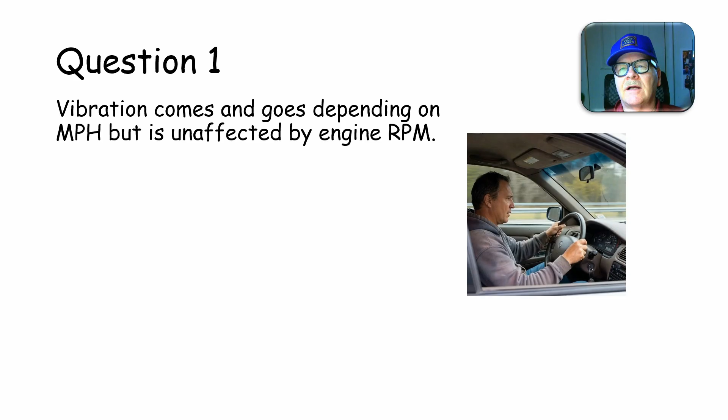Question 1. A vibration comes and goes depending on miles per hour, but is unaffected by engine RPM. Is that maybe a dual mass flywheel out of balance, or prop shaft balance, or worn U-joint, or does the pressure plate have a broken spring, or maybe a collapsed engine or transmission mount?

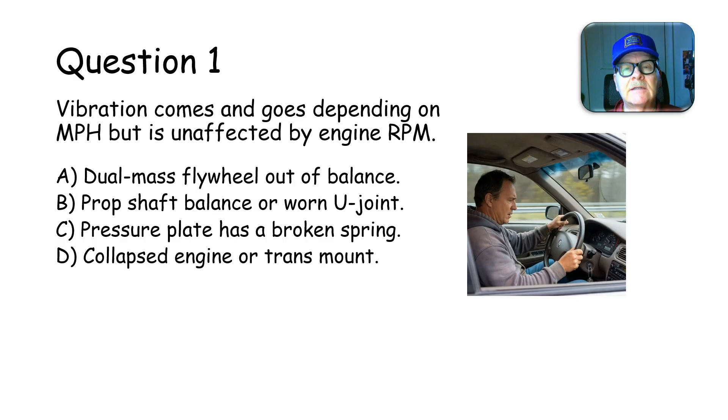Question 2. A limited slip differential chatters when the vehicle is turning a corner. Is it an out of round carrier, a bad outer wheel bearing, ring and pinion backlash, or does it need friction modifier?

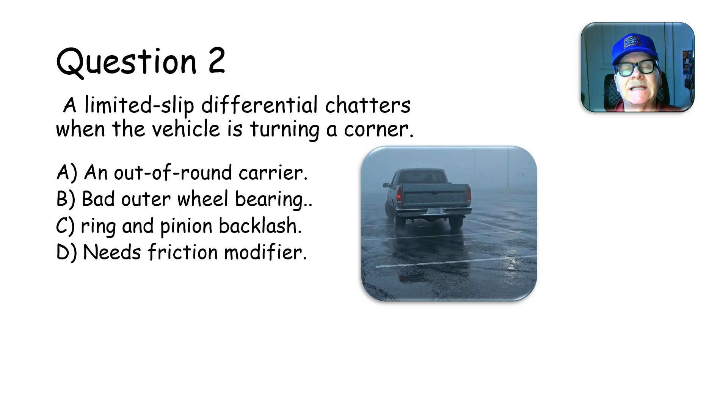On an EPS scan tool live data feed, what is torque sensor data? Does it measure motor current? Does it measure steering force? Does it calculate engine load? Does it measure steering angle?

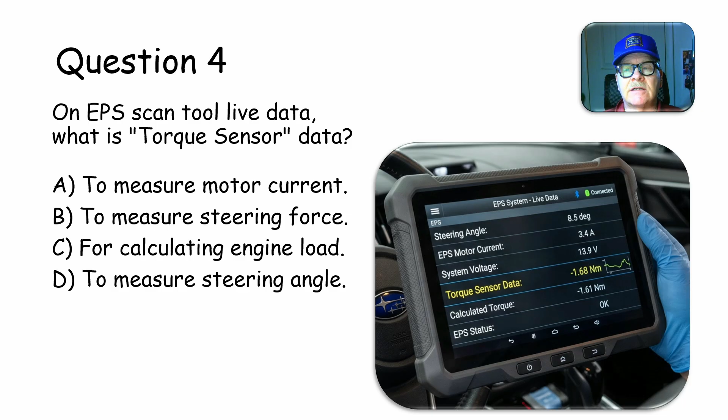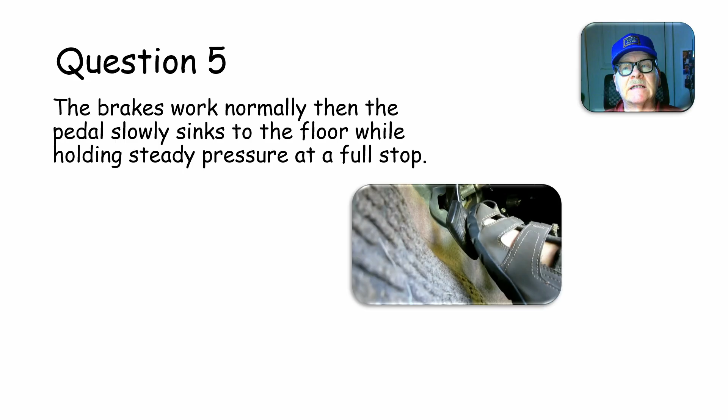Question 5. The brakes work normally, and then the pedal slowly sinks to the floor while holding steady pressure at a full stop. If the ABS pump motor is running, does that mean the master cylinder seal leaks, the hydraulic booster is leaking, or old brake fluid is foaming up?

Question 7. The battery dies overnight and a parasitic draw test shows 500 milliamps. Is this normal for vehicles with computers? Should the draw be 0 after the modules go to sleep? Is it normal if you're equipped with remote keyless entry? Or should it be less than 50 milliamps overnight?

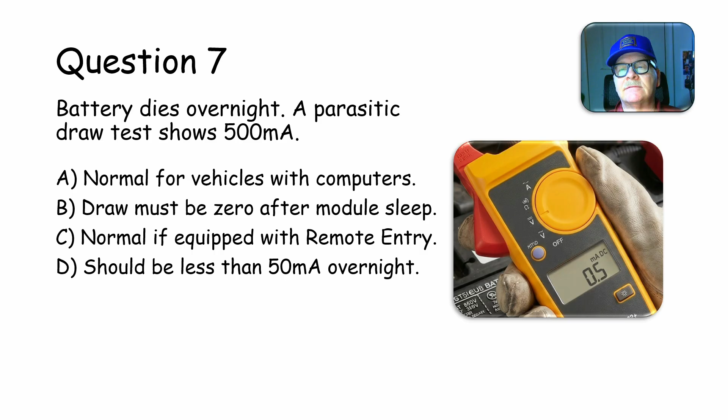Well, let's see what we can do about getting some answers to these things.

Now, this vibration, as you see coming and going, if it comes and goes with vehicle speed, like if it comes in at 45 and then goes out and then comes back in at 65, you're finding the resonance of an out of balance drive shaft, or you're going to have a worn U-joint, which won't feel exactly like an out of balance drive shaft, but the point is you're going to have a prop shaft balance or worn U-joint issue if you're feeling something like this.

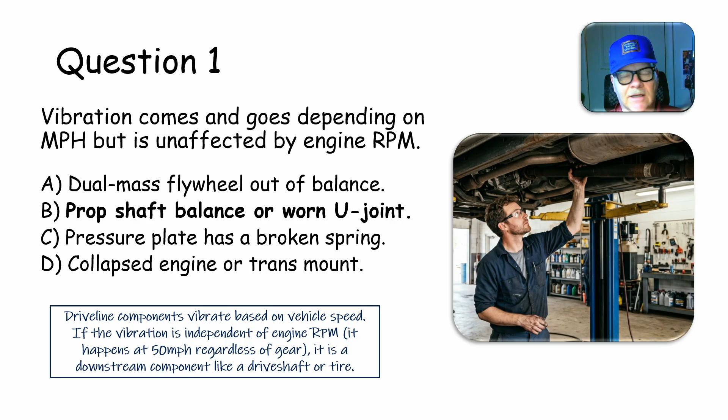Question 2, limited slip rear end. It needs friction modifier. That's the deal on that one.

The friction modifier that Ford makes that you put in these things stinks so bad. I used to keep a little bottle of it on my teaching desk, and I'd take the top off and pass it around so people could smell it and know what it's like. Boy, that was some stinking stuff.

But the interesting thing was I had a Taurus one time that was doing a surge. It kind of felt like an EGR surge, but when I started monitoring the modulated torque converter signal, I noticed the surge seemed to match that. I realized what I really should have done was a transmission fluid change, but I took some friction modifier I had in my toolbox and poured a little bit in there, and that cleared it right up.

The reason it cleared up is because the torque converter clutch, as it was modulating 10, 20, 30, 40, 50 percent, was not slipping smoothly—it was chattering and slipping. On Crown Victorias, you'll feel something like you're running over those little parallel asphalt strips coming up to a stop sign. It'll feel like that when the friction modifier is gone. Usually a transmission fluid exchange on those will take care of it.

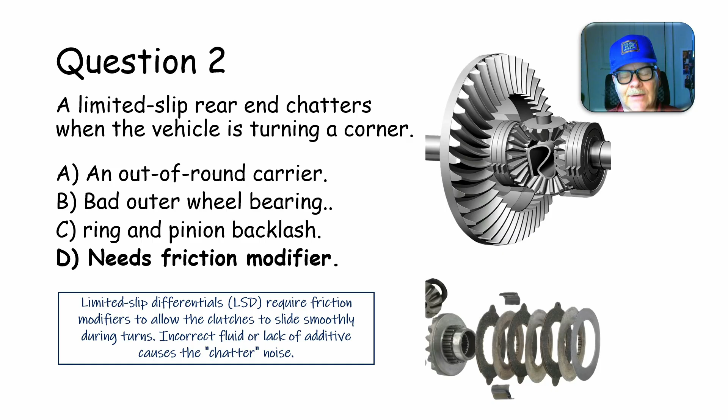If you can smell the fluid that's got the friction modifier in it, can you tell a difference between that and regular transmission fluid? I took a long time on this slide. I didn't know. Question 3.

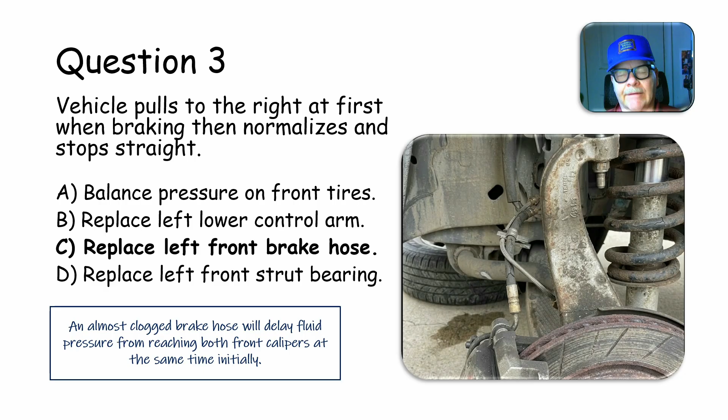This measures steering force, the torque sensor data. When you're turning the steering wheel, it needs to know how fast and how hard you're turning it. A lot of times it'll measure steering angle and steering force. So that distractor there is probably not very good, as far as that goes. I've got to turn on my laser here.

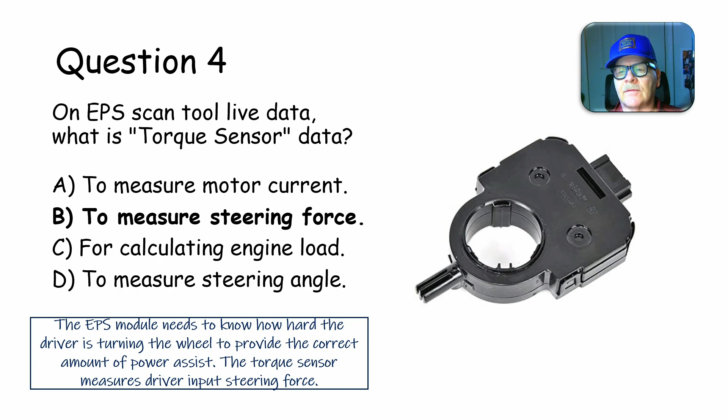All right, now then, question 5. The brakes work normally but the pedal sinks slowly to the floor while holding steady pressure to full stop. That's master cylinder seal leaks. This is just a little microcosm of that. When the seals are leaking, initially this rubber seal will bite, and then whenever you keep pushing it, it starts letting fluid leak past, and this goes forward because it's trapping pressure in front of this. As the pressure leaks past this into the back of it, then you're going to feel the pedal go to the floor. Then you'll let go of the pedal and hit it, and it'll stop again, and then it'll go down like that. But sometimes, in rare cases, some of the ABS valves can cause that, but that's almost never the case.

It's important to use a silencer band because it dampens rotor vibration and keeps it from making little chattering marks on the rotor. Now, you might notice this one I'm showing the video of was one that we had. This one didn't require a silencer band, and the reason that particular unit doesn't require one is because the cutting bits, while you're doing the cut, are making little circles in addition to machining the whole time, causing a non-directional finish, which keeps it from needing any kind of silencer band. This particular on-car brake lathe - not all of them do that. A lot of the on-car brake lathes still require you to put a silencer band on it, but this particular one didn't. It was one that I paid $12,000 for when I put in that new. I started a new automotive program in a town up the road, and we bought this one here, and this is a really, really good one.

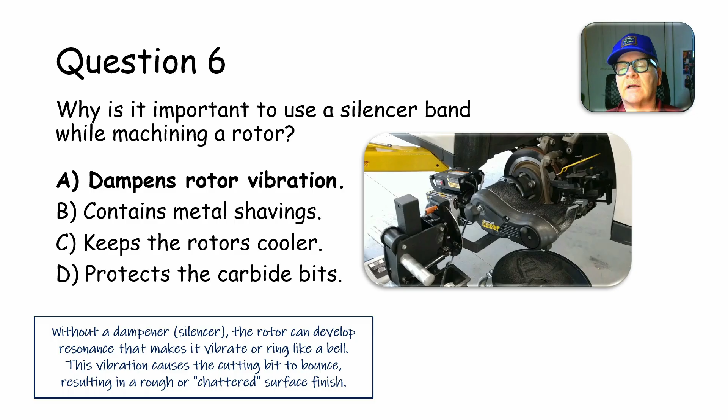Question 7. Battery dies overnight. A parasitic draw test shows 500 milliamps. It should be less than 50 milliamps overnight after the modules go to sleep. The reason for that is you've got little capacitors in here that have to charge up. A lot of the time - we had a 2010 Mustang, and we measured a draw that was probably 500 milliamps or something like that instead of 50. So I told the students, let's put this meter on this thing and just leave it alone, don't touch it, just let it sit here. We let the car sit there a solid hour, and after it sat there an hour, the current it was drawing dropped off to below 50 milliamps. So we determined that way that we had a bad battery on that particular one. But the simple fact was, you could have gone off on a rabbit trail if you measured 500 milliamps and immediately went looking for that.

Well, if you got one that doesn't go away when the modules go to sleep after an hour or so, what I would do is remove one of these big fuses going to the fuse panel, and put either that or an inductive probe around here, or hook an oscilloscope up to an inductive probe and let it show you on the screen.

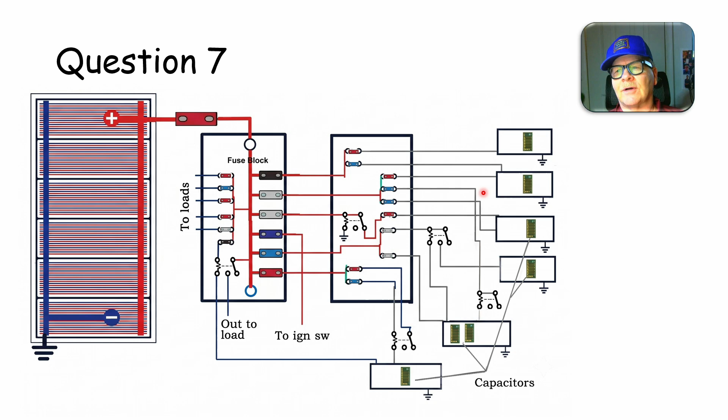Then you start pulling your big fuses. Let's say you pull this big fuse here, because it's feeding these fuses here, this one feeds all these little fuses, this one feeds those two fuses. Let's say pulling this big fuse killed the draw after all your modules went to sleep. You pull this one, it kills the draw, put that one back in place, then pull each one of these and see which one the draw is going through. You see how that works, that's how you're vectoring in on the draw.

Question 8. Passenger power window only works from the driver's side switch. Replace passenger switch, no joy. Okay, now this is the thing.

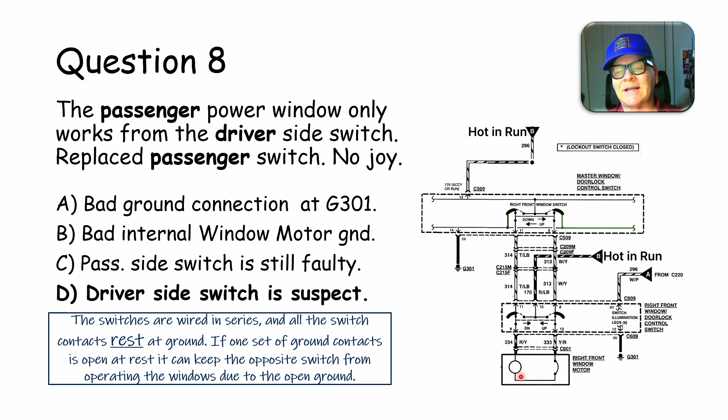You might notice how the driver's side switch is suspect, and I've run into this before. I've had my butt kicked around by one where the passenger side power window wouldn't work. I replaced this switch and it still wouldn't work, and it turned out the driver's side switch was causing the passenger side window not to work, even with the rest of it working just right, even with this switch.

But here's the deal. You've got a rail in that switch giving you voltage right here, and another rail here. Whenever this thing goes to lower the windows, let's say both of this ganged switch goes over, this stays on ground, this goes over to power, right? So this goes down here through that.

But when you release this, it comes back up here and you've lost your ground going to this switch down here. So if you let this come back up and that ground goes away—see, because that ground is still required when you're using this switch right here—then when you're using this switch down here, it has to get a ground through this normally closed contact in order to operate the motor. If it doesn't have a ground, it's not going to.

So what I taught my students to do was go over to the switch on the passenger side, find the wires coming from the other switch, and measure to see if there's a ground on both of these wires when the switch is at rest. When all the switches are at rest, you don't see a ground here, you don't see a ground here—I'm between the two switches, you see.

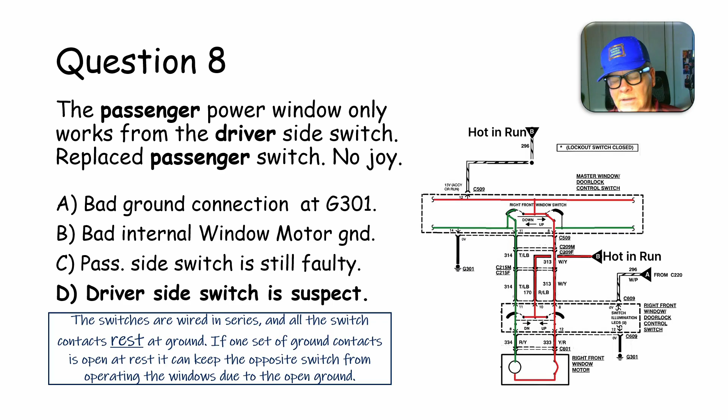Then I go to this switch up here and measure here and here. If I don't see a ground here, I know this switch is bad. If I do see a ground here but not here, I know I've got a problem somewhere on this circuit. That's not rocket science, but you just basically need to think while you're doing stuff like that.

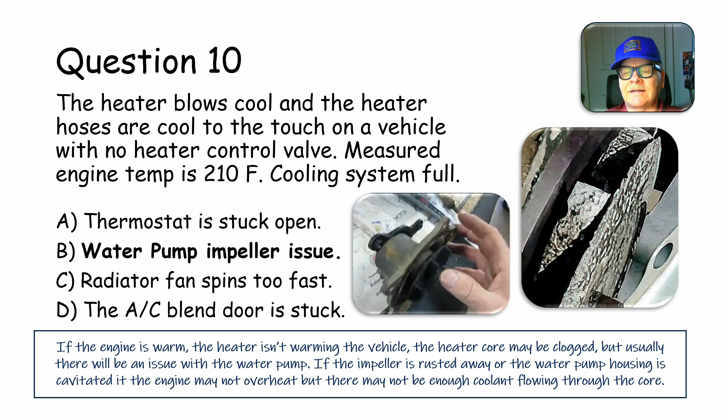I told you I take both heater hoses loose from the heater core, and I put a clear hose, like you buy from Ace Hardware, in there. This is a temporary thing, and you fire it up and look for coolant to go screaming through that clear hose. If coolant doesn't go through that clear hose, and that's how I've always found this, you say, well, the next place we need to go is the water pump.

I saw that one on a 4.2 in a 97 F-150, and it would run at 210 degrees if you let it sit there idling all day long. But when you went to drive out of the service bay, it would immediately try to overheat really fast. I'm talking about before you went 50 feet.

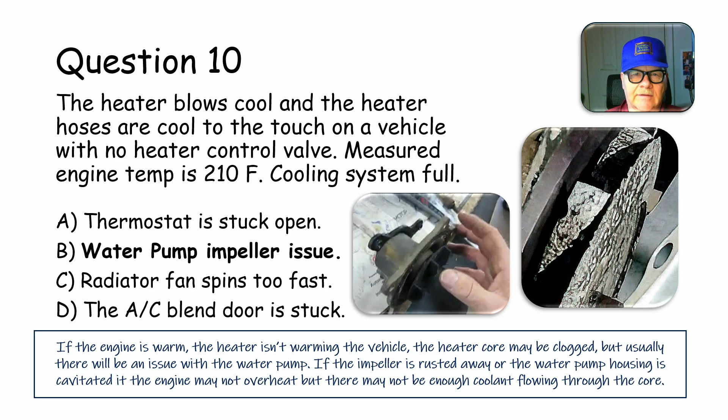And when we took the water pump off of that one, the impeller had come off the water pump. It had rusted loose and come off, and it was just laying there. Now, how that thing ran at 210 degrees without the water pump impeller in place, I have never been able to figure out. But one way or another, that's something I saw in real time.